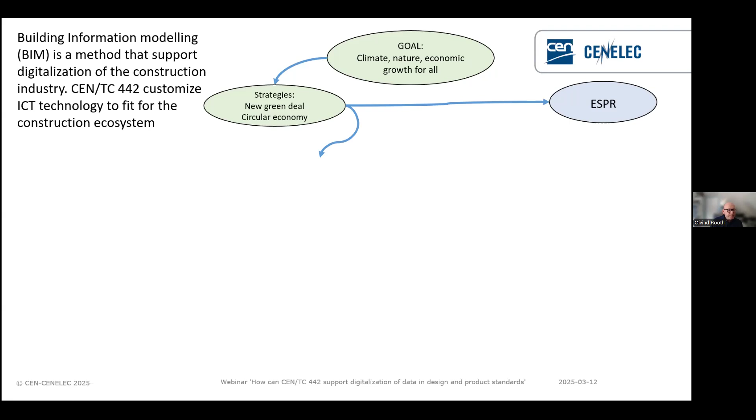Then we have this construction ecosystem that is defined. They have defined construction as one of the important players to reach the high-level goal. Inside this, they have this renovation wave, a strategy for what they should do with the construction sector, because it's focused on renovation, since most of it is already built.

And they have recognized that the construction ecosystem needs to be digitalized. So this is called a twin strategy - you need action on the practical side, but you also need to digitalize the system. Under this, you have two main projects, the digital building logbook and the digital building permit, to speed things up.

And from ESPR, we also have this construction product regulation. It's not from ESPR, but it's connected. And during this, you have the construction product digital product passport, as you have heard about. So it's all connected, and from this tree we see that they should be digitalized, and the method is using the BIM standards.

And the goal is a digitalized construction ecosystem supporting the high-level goal.

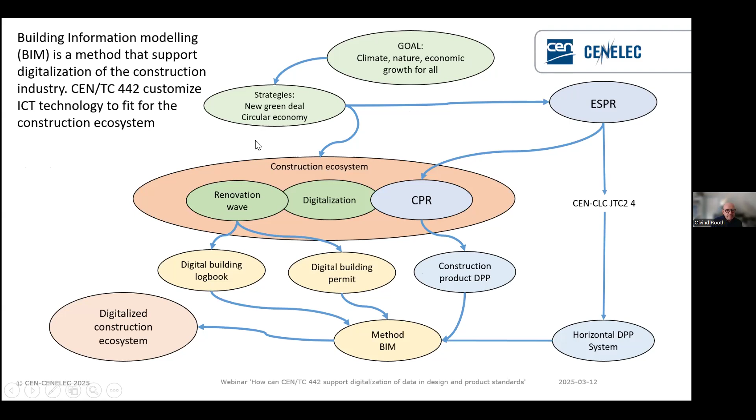We also collaborate with the ESPR working group, CEN-CENELEC JTC24, that is building up the horizontal system for digital product passport. This is also connected, so we are well connected to support, because they are building the horizontal system for all industries. We have the data in practice for the construction ecosystem, and this is connected.

So what we do today is just focus on that, in TC442 we make standards for how to digitalize. The CEN-TCs make product and design standards, and the industry produces digital information based on this standard. Then we have the digital product passport and other processes that are digitalized.

So the topic for today's webinar is the interaction between CEN-TC442 and the other CEN-TCs. I think that's my presentation.

Okay, so Stepanka, I give you the floor to present the standards for TC442 standards mapping. Okay, thank you for the speech and welcome everybody. My name is Stepanka Tomanova, I am from Czech Republic and working mainly for the Czech Standardization Agency.

My task today is to introduce you to what we are working on in TC442. Because we are all trying to get to the digital world, I think we are all thinking about two main topics. One is about data, how to create and use it. The second topic is how we can integrate digital technologies into our processes, because everybody has their own habits and knowledge, and I think we will still use them - we will not change them much, but we need to transform to the digital world.

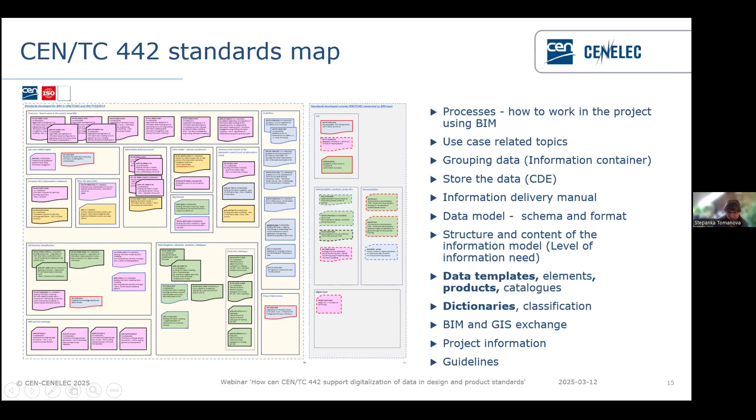And if you want to use our map, you will see the different shapes. You can click on them, and then you will get a more detailed description, which will cover the scope, when you can use it, in which part of the life cycle you can use the document, and for whom it is dedicated. And on the right side, at the top, you will see the legend, explaining what the colors and shapes mean.

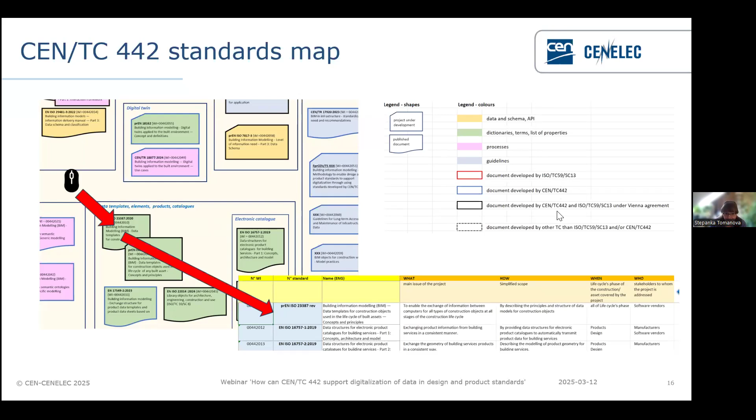Next, please. And if you want to use this map and follow what we are doing in TC442, you can find it on the CEN-CENELEC pages dedicated to the construction part. You see the link to the map. And because we wanted to publish it on this web page, we wanted to find the simplest way to do it. It means the map is in an Excel sheet and you can download it. It will be continuously updated, let's say, each half of the year.

So you can follow how the projects are developing, what is already published, and what you can use, and you can connect with us and cooperate on our projects. That's all.

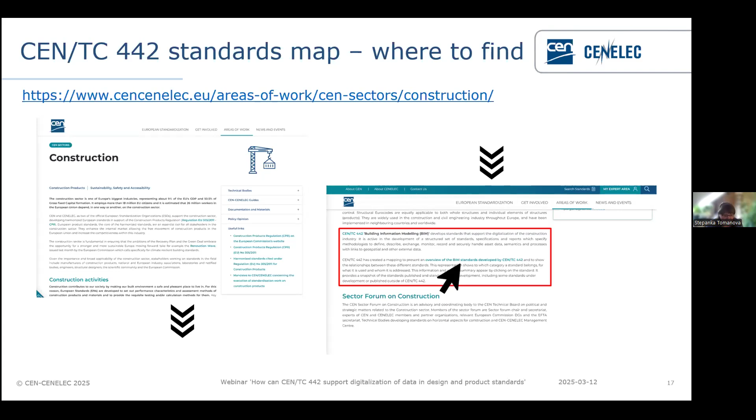Okay, so now is the turn for Espen Schulze to present a technical feedback with the construction product regulation and how it connects with working groups from TC442.

Thank you, and thank you to everyone joining today. Good that you can come and listen to this topic, which we think is very important. My name is Espen Schulze. I work in a Norwegian software company called CoBuilder, leading the research work there. Spending much of my time outside in standardization, mainly in CEN-TC442, but also on ISO level, TC59, the BIM standardization there. And I'm leading 3 projects now in CEN-TC442 related to the things I will talk about in this presentation.

First, I would like to connect CEN-TC442 and some of these standards of today. I want to connect that to the new construction product regulation. I think it's important for us to know and see the link that has been established from the European Commission side, that they have found

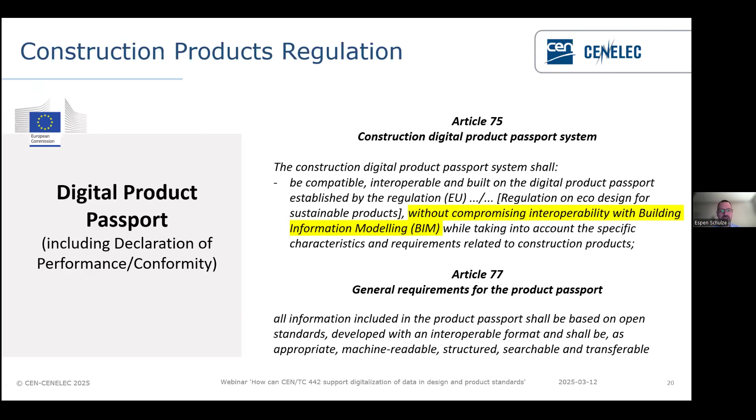And also the sentence in yellow here, which again is important for us, the industry, to understand, is that they are requiring interoperability with building information modeling. So that is good news for the work we do in CEN-TC442.

And these standards are the ones that are closest to that topic in the CPR. We have been developing standards for 10 years now on this topic, data dictionaries and data templates. The 3 ones on top here, I like to call them the horizontal technical framework for data dictionaries and data templates.

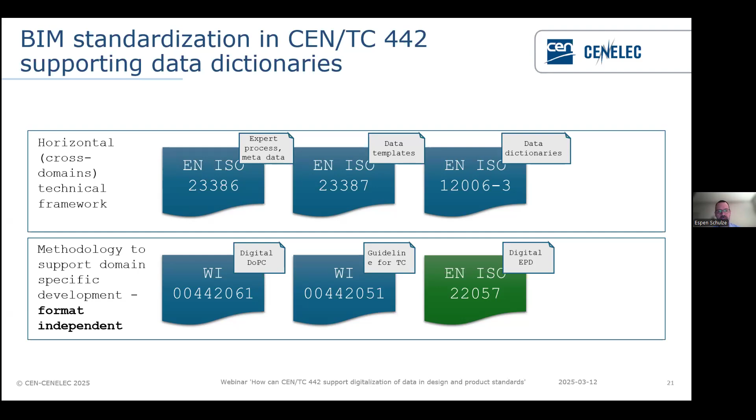And the ones on the bottom here, they are implementation standards that will support creating semantic content in data dictionaries. And I will explain a little bit more about what these are all about.

As mentioned by Oivind, we have a horizontal working group in TC442, which has a horizontal role where we will and can and are consulting other technical committees in Europe, in CEN, on how they can adopt the standards that we are developing. Standards that support digitalization and how these standards can have an impact on how standards are created in the future.

For instance, in this case, we are developing what we call internally a guideline. It's a methodology for CEN TCs, both design standards and product standards, to make the conditions and requirements - the shalls, the shoulds and mays - digital.

We want this to be available in data dictionaries, open for the industry. The point here is to define something once. For instance, requirements through properties for products should be defined from the CEN TCs and be made available in data dictionaries, which then will be available for software, external software.

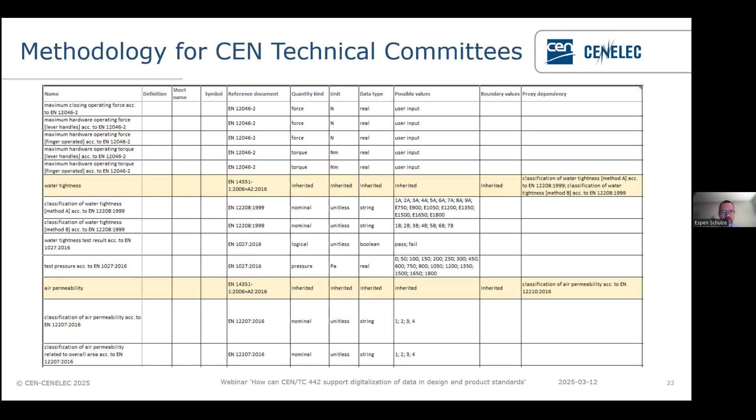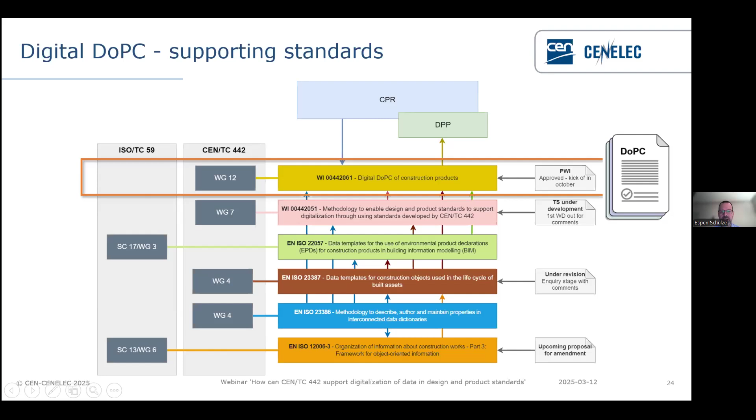Yes, that was my presentation, and thank you for listening.

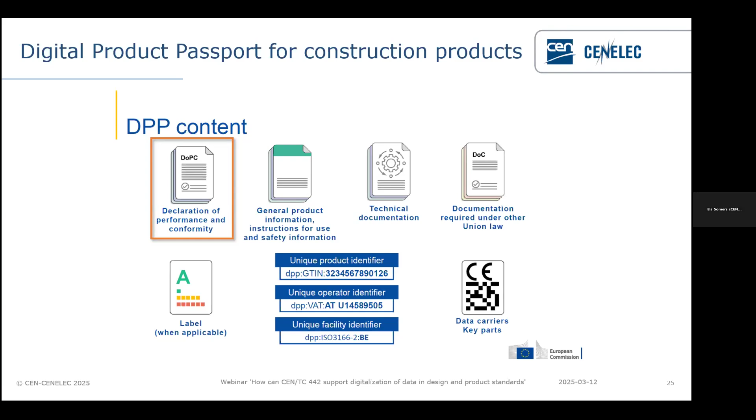Yes, hello and welcome everyone. From my side, Kai Oberste-Ufer, my name. I'm here as a representative of TC33 working group 4, TG18, which is the TC dealing with doors and window shutters, building hardware, and curtain walling. I'm also part of working group 7 and working group 12 in CEN TC442, but also connected there.

I would like to share how a technical TC, a use case TC, is connected with the work of TC442. So TC33, the door and window technical committee, has a history.

It started its work in a European organization called ARGE, an umbrella organization for building hardware looking at doors and windows. In this organization, there was a group established for digitization, working with BIM properties. So at some point we said it made sense to lift this project to create BIM properties for door and window hardware to a higher level, bringing it to CEN.

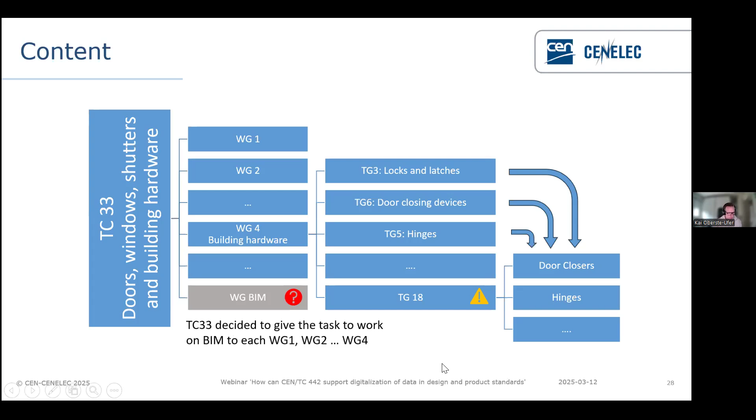Next one. Okay, so what is the goal of the BIM working group here?

First of all, it's to create a technical specification on the basis of EN ISO 23386, which defines how properties should be collected and stored. This is the basis so that the work here can later on be used also in other projects and systems. So technical specification is one goal for BIM properties for door and window hardware.

Second, an attachment to this technical specification with a property collection - this is really the usable format. We would like to create an Excel sheet, and maybe step two, since Excel is the only thing we have at the moment. Step two, then later on, we are aiming to bring these properties into a kind of European dictionary of door and window hardware, whatever that means.

At the moment, there is no real answer how we can handle this, what will be used here. But the goal, of course, is to bring these properties into some higher level organization and technical framework - maybe looking at the DPP, and maybe also looking at what JTC24 is doing here in terms of the DPP technical system. So a common dictionary is missing at the moment, but there is a lot going on towards a global unified, or at least system, of dictionaries in Europe.

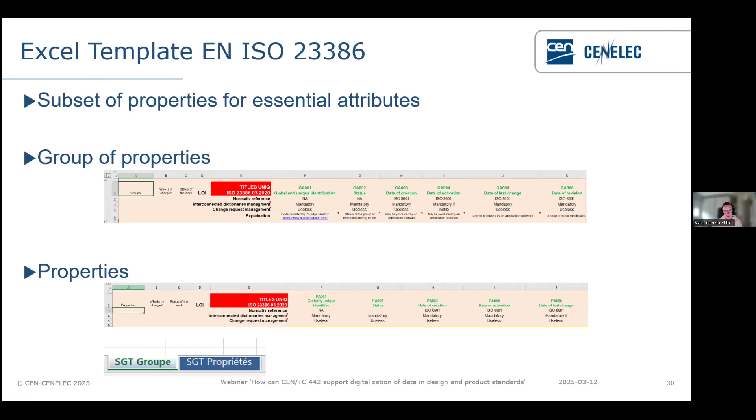This is an example of how the practical work is done. For those of you who know the 23386 standard, it consists of a group of properties, or properties for groups - so it's the grouping that needs to be described, and the properties as well. For both, a couple of attributes are defined, and we developed an Excel sheet that holds all these fields. There are 20 fields for the groups and roughly 40 fields, 40 attributes for the properties itself.

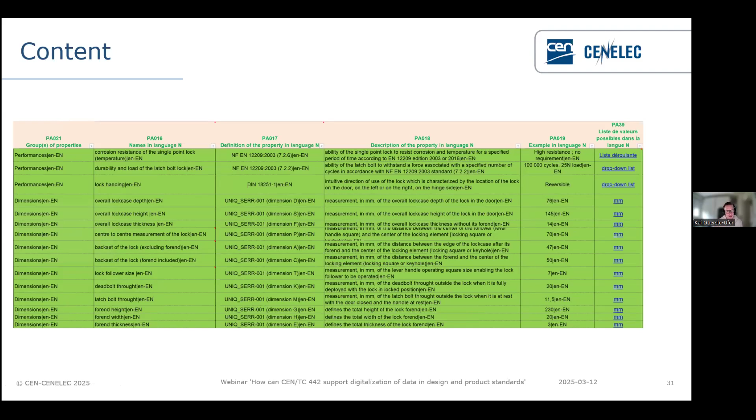Not everything needs to be filled out here, so we tried to get a good practical balance between covering everything that is needed and the practical work that needs to be done. And this is also a part where we heavily connect with working group 7 - oh no, with TC, with working group 7.

We're from TC442, because also here there are properties defined on how to create standards, how to digitize standards, and that's where we are aligned - where we as working group 7 and TC33 aligned, first of all, on how to identify gaps and touch points. So what is done in TC33, what is done in working group 7 - since both projects have a kind of different approach, but somehow are similar, we need first to align where the gaps are and prepare everyone.

So this is where TC442 helps TC33 to be future ready, to be future proof when it comes to collecting properties, in order to put it later in the process that is currently established.

So there is still an open discussion on how to enable other working groups in TC33 to work on properties. At the moment, it was decided that every working group should create its own BIM group, but it's still open - other TCs might do it differently, other working groups might see it differently. There is an ongoing discussion: how should we, on CEN level, handle the digitization of properties in these TCs? It's an open discussion, still not solved.

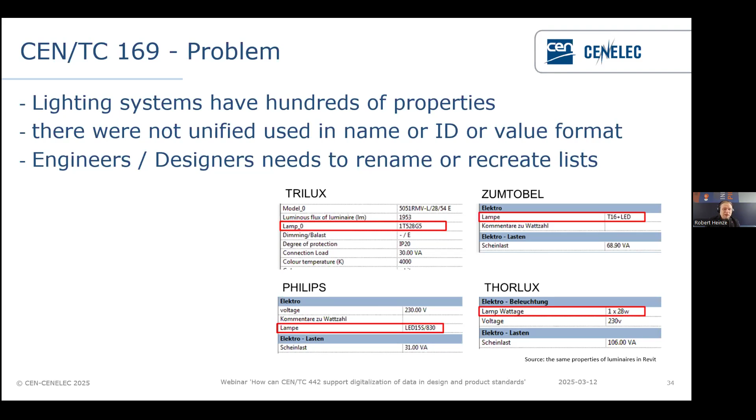This is great that we have BIM and that we have 442 with the standards, to help us solving this issue. And of course we need experts to do this. This is something which is different between 442 and the specific building discipline TCs like light and lighting or doors: we have the experts, we know the properties.

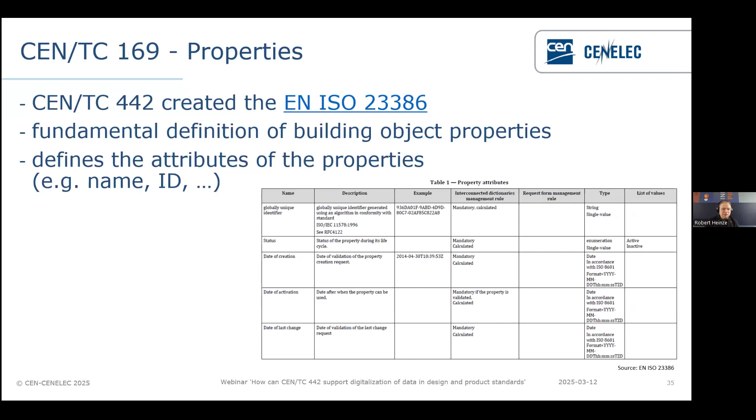As said, we need experts to deal this, and we have done it. So we started on the association level - in the German association, there's also a European association with a lot of connections. We started just to enlist all the properties we are knowing from luminaires, and this is done through classification systems, local PIM systems, also standards. There are a lot of lighting standards with a lot of properties. We gather them all together with no prioritization. This is important - we had a lot of discussions in our group.

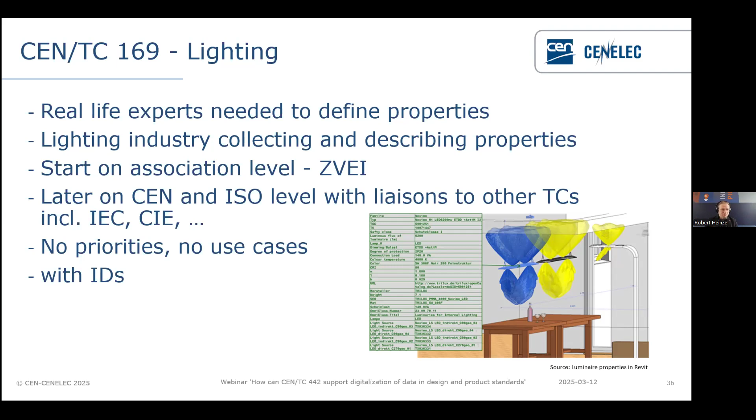Is it an important property? Is it more important than another one? Depending on the use cases, we decided not to go into priorities and not to go into use cases. We just collect - we don't invent new properties, we just collect what is existing, what is in use on designer levels, on architectural levels, and so on. We just gather and give this list, delete all duplications, and then we give them IDs. This is the basic job you need to do. And BIM standardization can help you. Next slide, please.

This is the result of our work. We jumped from association level into the CEN level with more experts than just on the association level, and also with more structure, more rules, and other publication forms. We created CEN/TS 17623. This was more or less a large table with around 400 properties, following the structure of the BIM EN ISO 23386, and filling the table up with properties we have on our lighting systems, sensors, luminaires - everything which is dealing with light and lighting. We unified the naming, the namespace, and also the description, and where it's possible we connected it to an existing standard. So most of this is connected to existing ones.

Later on we jumped onto the ISO level, and also made an ISO and CEN-ISO at the moment out of this, as a technical specification. This was fast, this was easy - there were a lot of global experts on the ISO level, filling up the missing properties. Now we have something I like to call a mapping core between requesters of data and providers of data. So if you are a manufacturer, you can provide your data with the IDs, with the naming, for properties which the other side, the receptor of the data, is also understanding. You can easily connect, and you don't need to deliver specifications with it.

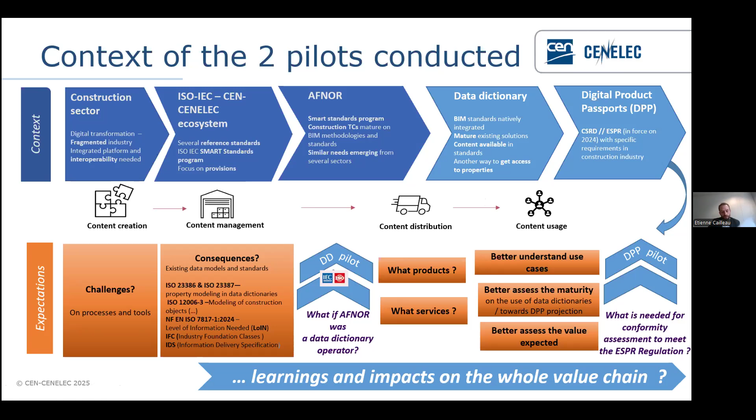In that context, after that pilot, we decided to go a step forward and see how, based on that data dictionary, we can support or investigate how we can support the establishment of digital product passports. But I will not go into those details today, it will be too much. If you can, Ursula, we can go to the next slide.

As I mentioned already, the main learning that we had from those two pilots is that there is a strong need, especially in the construction industry, but not only there, to establish a common language in order to ensure semantic interoperability between sectors. Definitely, a lot of content is maintained through standards within standardization, and standardization has to genuinely embed the maintenance of that content into their activity to better support the industry.

So it's a strong learning that we had, and now it's not only the construction industry asking for enabling more semantic interoperability thanks to standardization organizations, but it's coming from many different sectors and now from several countries too. So it's something very interesting. That's where we are trying to influence and contribute properly to the different programs at ISO and IEC level and CEN-CENELEC level, to embed that need for semantic interoperability and have it properly tackled by standardization organizations as soon as possible.